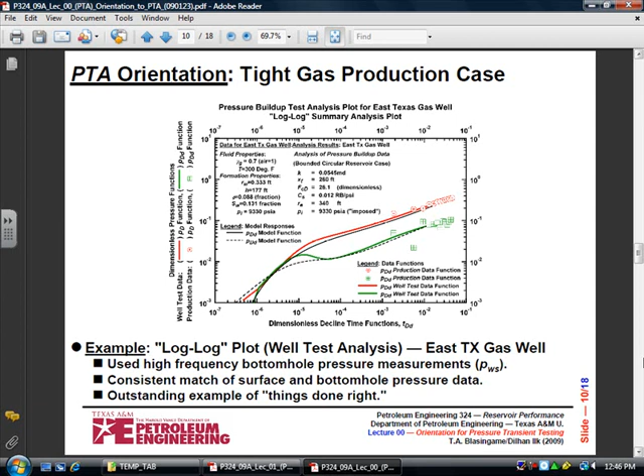All right, we left off on here. Is that right? Yes, I know one back, so I'm thinking about this one, okay?

Now, how'd you guys enjoy Dr. Schechter earlier today? I'm sure Ted will filter this out.

Dilhan, what was going on in 1935 in Turkey? You guys had just rescinded cannibalism? Yeah, okay. Mr. Stone, where were your relatives swinging from the trees in 1935? Alabama?

It allows you, by using a certain diameter of a tube, and you put a weight on it, and it's got a sort of a frictionless bearing, and you spin it, and that gives you an indication of what the pressure is. It's accurate. It's a prover for pressure. So, and yes, we still use this as well. So basically, even though this came out 74 years ago and probably was in play for 10 years before that, we're still completing wells this way. We're still using the same kinds of measurement devices, same kinds of pipes, same kinds of this, same kinds of that.

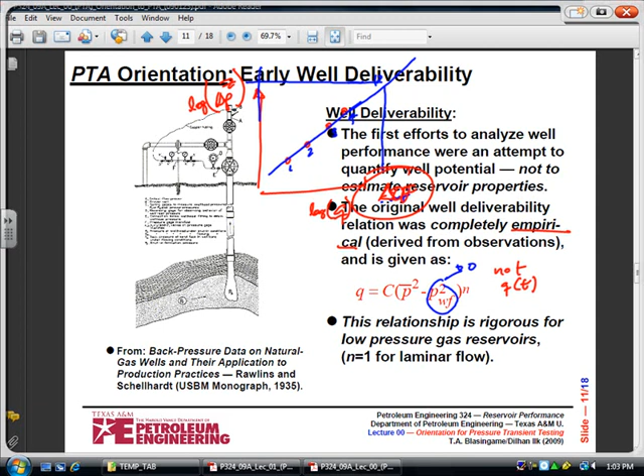How would you deal with this today? If you owned a field and you had partners in that field and you didn't want to be prorated, how would you handle that? Sorry? Louder.

That actually is a good question. I hadn't thought about that. Let's say that I am the most wealthy of the companies in there. What should I do? What's a simple solution? Make them an offer they can't refuse.

And this actually happened a couple of years ago. Encana bought a field in Robertson County. They had partners, and they paid them $2.6 billion to get out of it. And it looked like it was a bad idea at the time, but they found this fantastic reservoir, very high permeability and high porosity, out in the middle of nowhere in a very low turbidite environment. And they made a hell of a lot of money out of this. But it was a strategic decision that they decided to buy out their partners. And at the time, nobody really thought it was a good idea, but they did it, and it worked.

But, you know, the Canadians are Boy Scouts, no offense if you're Canadian, and they do things like that.

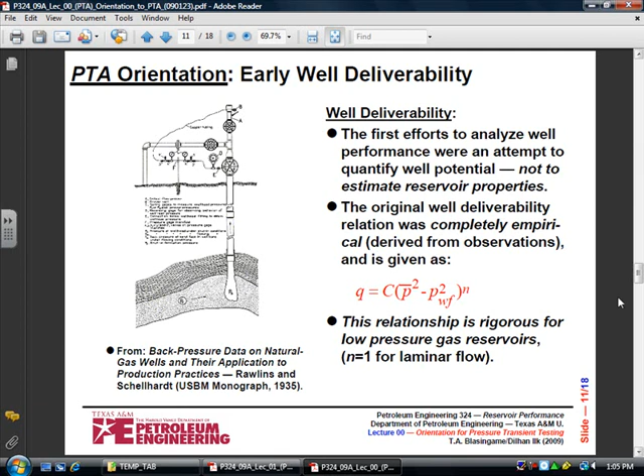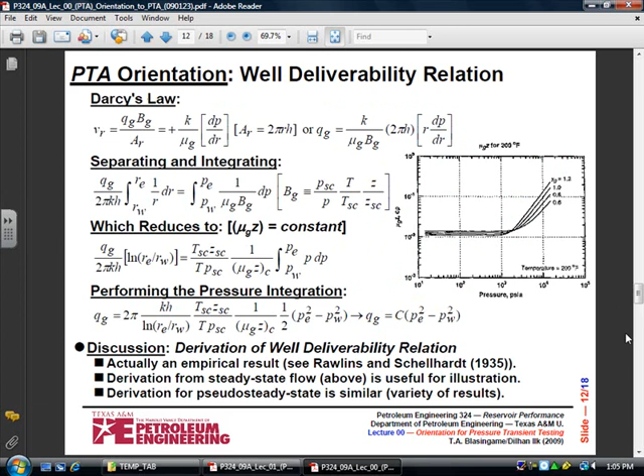Okay, so this is a derivation of this relationship. Dilhan, this would be a good quiz question, right? Maybe for Wednesday? Yeah, so they can study that.

And this is that concept we talked about a moment ago, this 4-point plot. And I'm just going to make up 4 points here. So there's 4 points, and we're looking at the pressure drop squared and the rate. And then they've drawn a line through this. Mr. Stone, you like this line? That's pretty good. Yeah?

Now, what would happen, Mr. Stone, if you came in and you had some governmental pointy head that said that that's the line you're going to use from now on? How does that affect you? Because now, when you come over here, your AOF from that thing is much less than your AOF from that thing, right? Now, we knew all along that the straight line wasn't true.

How many points does it take to define a straight line? Who wants to take a shot? Somebody new. Thank you. Anybody else? How many points does it take to define a straight line? 2. Except in Texas, where it takes how many? 1. How do you get away with that? Because they take 1 point and then they force a slope on it. Okay? That's legal in Texas.

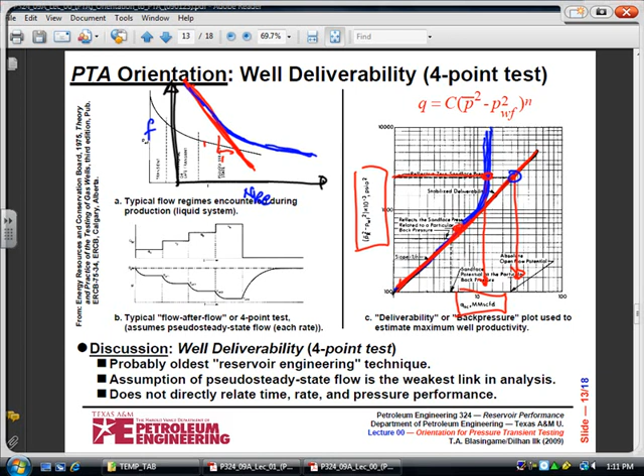You are required to use the blue line. Interesting. Okay. It's almost time. Remind me when they get 10 minutes for their quiz.

Leaks. Believe it or not, boys and girls, you will encounter wells in your lifetime, in your very near lifetime, that will leak. Yep. I hate to tell you that, but it's true. Okay. Maybe old perfs, maybe a bridge plug, maybe something slipped, maybe Joe Bob didn't seat the casing right or something, but you will deal with leaks. You'll also deal with multi-phase flow and other problems like that.

We are only interested in what happens at the reservoir. But getting to the reservoir, our good friend, the well completion, is going to make us very unhappy from time to time. So make sure that you have the completion report in your lap. The tubulars, part of that, the surface facilities. I've seen some mighty strange things when it comes to pressure transient testing.

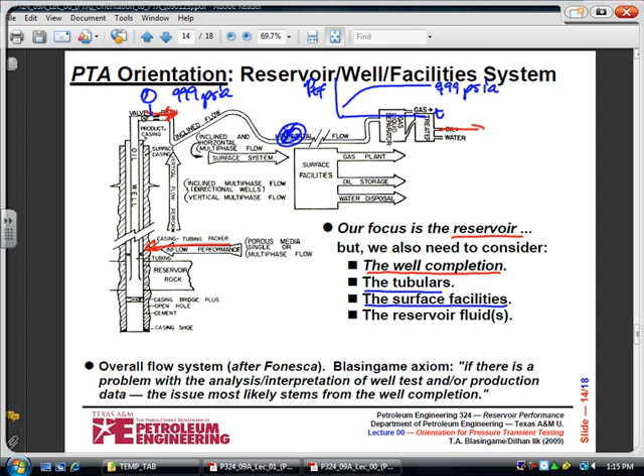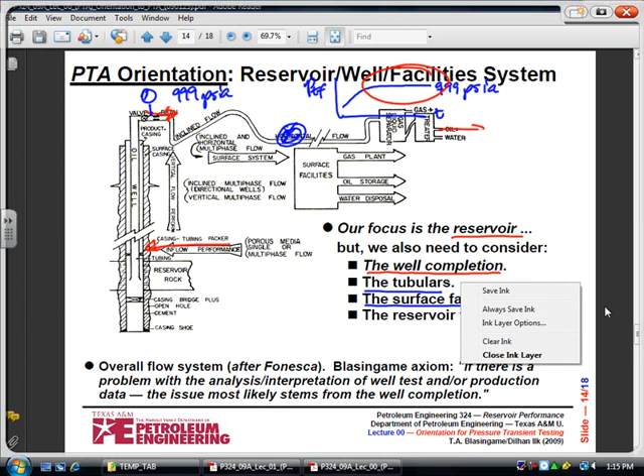And I said, "You guys didn't realize the well went back on production?" No. "Well, what can you do with this pressure data?" Nothing. Okay. They didn't really care. All right, so let's go down. Let's close this guy.

All right, so the thing that I want to leave you with is during pressure transient analysis, and I want you to think about this very carefully, you're going to be using a surgical knife. Sometimes, you can chop a tree down with a surgical knife, but it's not a very good idea. So whenever you're using pressure transient analysis, make sure you know what you're focusing on. You're looking at an event in the life of the well.

Now, what's happened in recent years is the dominant vendor has begun to work quite exclusively with numerical modeling. They like this. That just means things are much more complicated. The more complicated you make the model is not necessarily a better answer. Then there's something called deconvolution. Deconvolution is like perpetual motion in petroleum engineering speak. What happens is we always want a constant rate system because that's easy to analyze. So what we've done is we've taken some mathematical relationships and created deconvolution algorithms.

Now you may be saying, you seem to know a lot about this. Yes, I do. And 20 years ago, I wrote a dissertation on it, and it sits on a shelf, and nobody uses it, and blah, blah, blah. And then 15 years later, somebody over on that side of the room came up with yet another method of doing deconvolution, and your thesis sits on a shelf, and maybe how many people in the world have read it, and even though it might have been pilfered for a software program or two, nobody else really cares, right? So deconvolution, you got to be careful with that. Just be aware of it.

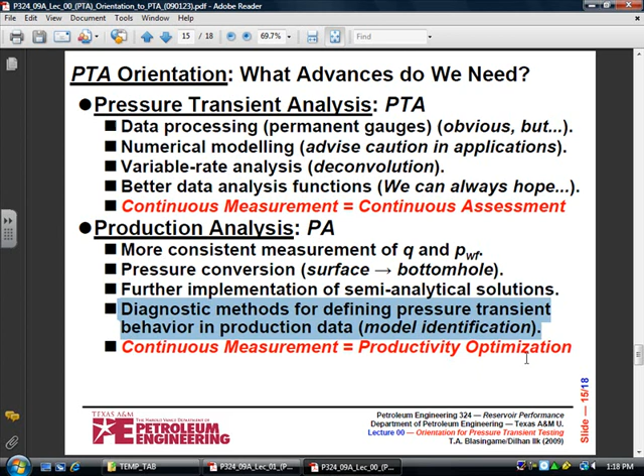And then looking at diagnostic methods that allow us to see features in production data the same way we do pressure transient. That's one of the things I want you to be aware of as well. Okay. And then these are some of the questions that you may want to consider in pressure transient analysis.

And what I want you to think about is, yes, whenever you look at the software, this morning, I had a phone call from another professor in another university, and he was trying to analyze some, what's the right way to put this? I guess without betraying the name of the reservoir, a shale oil reservoir that is very difficult to produce. Somebody had asked him to look at some well tests from it. Well test analysis is not his specialty, so he asked me for some help.

What do you think the data look like? Is it good data, bad data, happy or sad data? What do you think? Marmina? They wouldn't have given it to a professor if it was any good. It must be garbage. And it pretty much looks like it is. And what do they want to know? They want to know, can you get reservoir properties out of this?

Well, you know, that's why there are consultants in the world, because they can get an answer out of anything. I'm still a little bit concerned every time I look at the data sets. And Dilhan, I'm going to point you out to where they are so you can take a peek too and beat your head against the table. Now, what we can do is we can come up with qualitative analyses, but quantifying reservoir properties is going to take good information. I just want you to remember that.